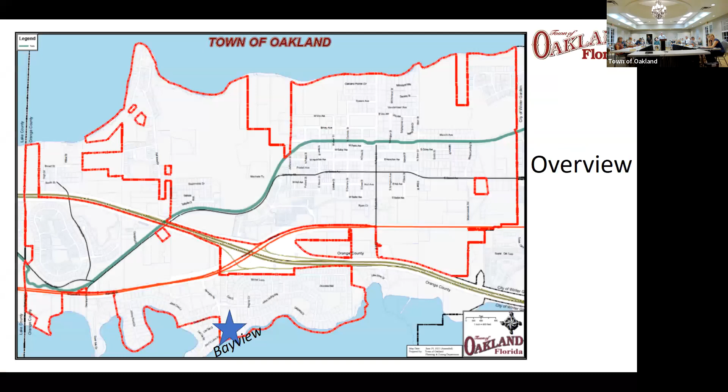Thank you, Mayor. Again, Brad Cornelius with Wade Trim, the contracted town planner. As you all recall, in August this was before you for your consideration for the preliminary subdivision plan for a proposed 20-unit single-family subdivision at the end of Remington Road.

Where we are in this process, just to make sure everybody is aware, this is still step one of the overall process for this project to move forward. This is the preliminary subdivision plan, so not all the 100% engineering answers are here yet. The majority picture is there, but there are still details to be worked out as it goes through the process. But overall, this is reasonable in what we have before us. If approved this evening, they take this concept plan, develop the 100% engineering construction plans, prepare the plat, and that will then come back before you all for approval again. So you'll see this again as it moves through the process. Those are steps 2 and 3. We're at step 1 tonight, just to make sure that's clear to everyone.

So again, just an overview very quickly. This is a 7-acre site at the southern end of Remington Road, and it's a vacant property at this point.

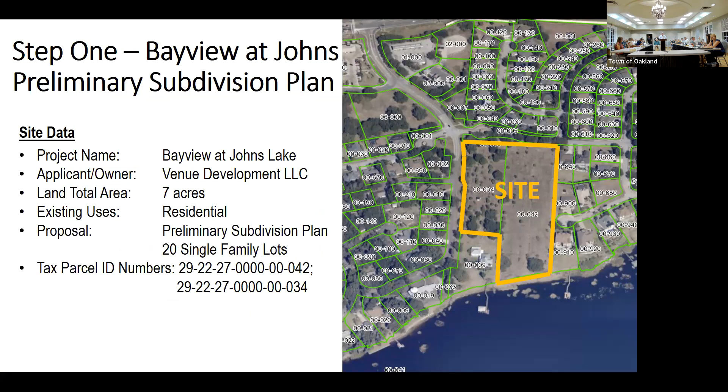This is the new subdivision plan. The full packet is within your agenda. It's still 20 lots as you saw previously. What has occurred since August is a lot — there have been a lot of meetings, discussions, and review working with the applicant. As you may recall, there were several issues and concerns that came up before: concerns about the adjacency and compatibility with the adjacent neighborhood, and concerns about traffic and infrastructure. Those are probably the two largest concerns discussed at the last meeting, so we've tried to address those over the last 3 months working with the applicant.

So the first part is to go over compatibility in terms of density and lot sizes, which was a concern at the last meeting. This property, within your future land use map and comprehensive plan, has a designation of low density residential, meaning it could have a maximum of 3.29 dwelling units per acre — that's the most that could be on this property if things fit. This property, at 20 units on 7 acres, is being developed at 2.86 units per acre, so it's actually being developed at less than the potential maximum. Nobody's ever guaranteed the maximum because it depends on site characteristics and constraints, but they are within the maximum allowed.

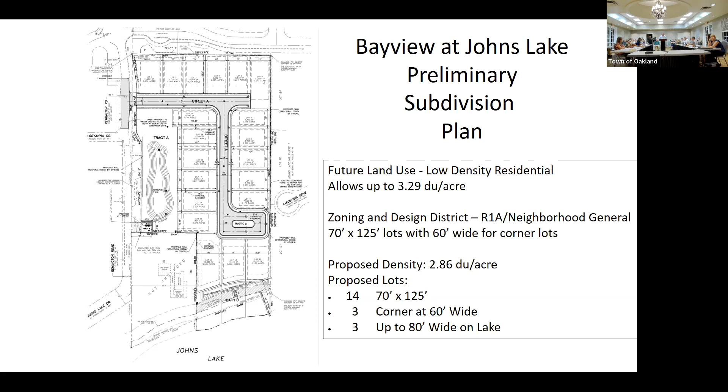That addresses that. Next, the Johns Landing buffering coordination — probably a big part of our discussion at the last meeting. As you're aware, this property abuts Johns Landing to the north and east. The pictures on your slide show the existing fence with brick columns on the northern and eastern boundary of the property.

So there is an existing fence line there. What's been happening since August is the developer, the applicant, has been meeting with the John's Landing HOA to try to work through the issues and coordinate what would happen along those boundaries, those interfaces with the project. The last meeting was on October 17th. I have in your agenda packet a snippet of an email from Mr. DeRuthi about the result of that meeting, but I won't speak for them. I'll let them present what happened there.

One thing we've recommended to address this concern is a condition requiring them to continue dialogue and coordination with the HOA to come to a resolution on what that boundary will be. Will it be a brick wall? A landscape wall? What will it be? What do both sides want it to be? Again, consistent with what we as a town will approve.

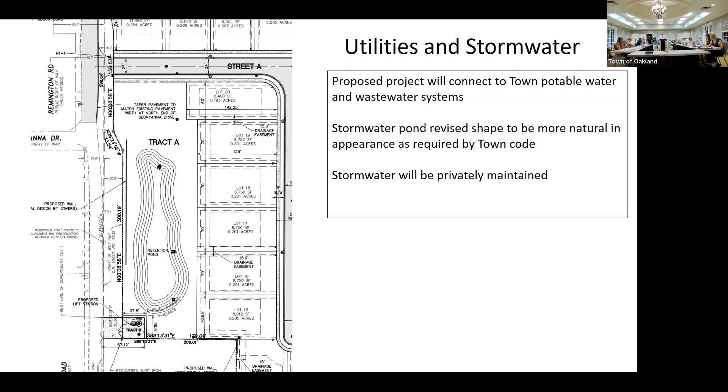The next part was before you back in August and is still before you - this project also involves a memorandum of understanding. The road and utility improvements I spoke about are part of that memorandum, which spells out what the developer is required to do at their own cost as part of this project: their access to the project, constructing and dedicating the lift station, looping the water system, providing all on- and off-site improvements required for connection to the town's wastewater system, constructing sidewalks, reconstructing Remington Road, and when they come through platting, providing appropriate financial guarantees for the infrastructure construction as required by your code. The applicant has already signed that memorandum of understanding, agreeing to all those conditions. What we're asking the town commission tonight, if you approve this, is to also authorize the town manager to sign that memorandum of understanding for this project.

In our review of the updated engineering plan, our engineer raised a couple of issues we believe can and will be addressed prior to final engineering. One concern we discussed with the applicant on Friday is the grading of lots, particularly the three on the lake side - there's significant grade change on those lots. We want to make sure that's appropriately addressed so it doesn't cause site impacts. The applicant has some ideas, like stem walls and terracing, which already exist in John's Landing to deal with those issues. We believe it can be addressed as they move through the rest of the process with the town.

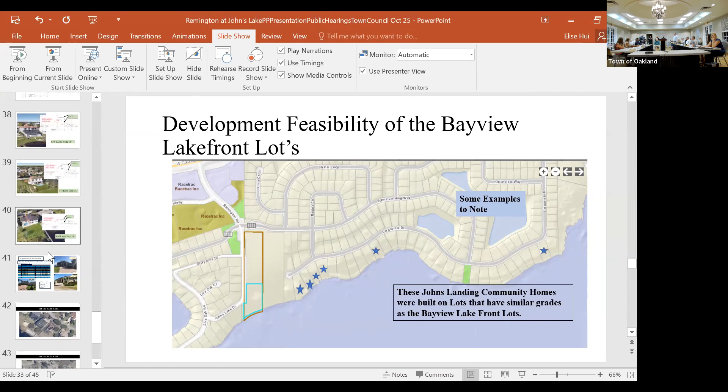Well, I do, and in regards to some factual information we've gathered, because I took the approach, quite frankly, to try to evaluate lot sizes in a very correct, objective way, meaning let's prove ourselves wrong, let's prove that it shouldn't be, or should be, larger per se. And if I may, I don't know if you can see these slides, but I did an analysis of the closest benchmark, which is John's Landing.

So we looked at the overall lot constitution of the 31 lots along the lakeshore in John's Landing. Of those 31 lots, basically 10 of them, a pretty good percentage, about a third, are within what I'd call arguably a tolerance in size, ranging anywhere from 80 feet to 96 feet. There are 3 lots that are respectively 80.65, 87.88, and 86.75.

And I looked at it and said, well, how is the curb appeal of those homes on a lot of that size? Because ultimately we're in this for the long run, we're going to be there to do site work, we're going to turn it over to the builder and they have to have viability. So I looked at it again from a subjective point of view. They don't look so bad, in terms of the curb appeal of these homes, on an 80-somewhat foot lot.

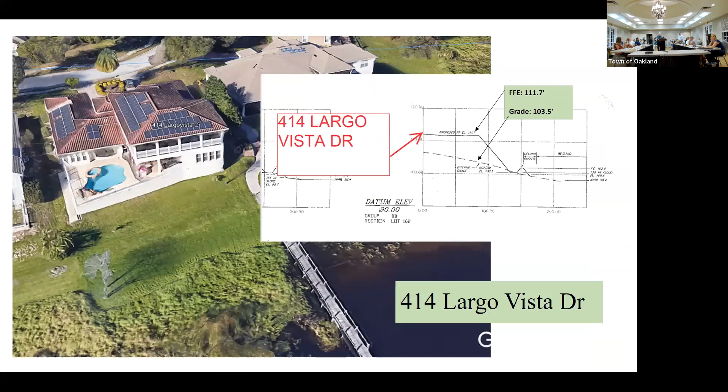So are those three examples you have up there the 86? Yes, the 80, the 86, and those are in John's Landing, the three smallest lots on the lake, correct. They're 86-foot wide lots. An 80 and 86 and an 89 or something. 80.65, 87.88, 86.75. So three lots right there are 87 feet or less. They're in John's Landing. He's giving you an example of what the 80-foot lots could support within Bayview.

And there's aerials as well. Granted, some of the lots may lie differently towards the lake, but it just appeared to make sense.

And this is the appropriate three lots adjacent to your property. I thought one was like 125 feet right next door. Yeah, it is, they vary. He was talking about all the lakefront lots as a whole. The ones that are adjacent, I went and looked at them also. The ones adjacent to them are all in the 120s.

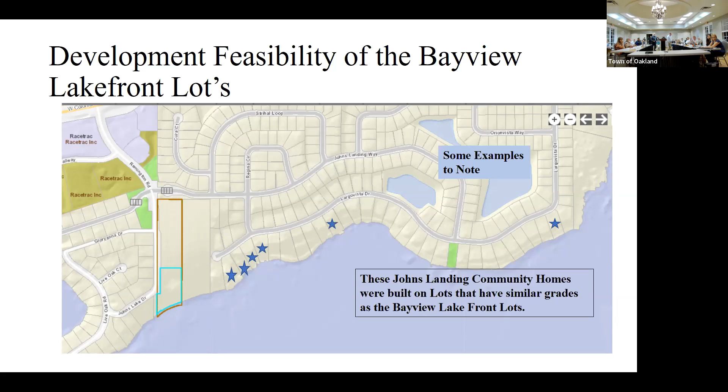The only issue I have, but I would also question their measurements. I'm not worried, I mean the other lots on John's Landing aren't square or straight like this, they've got a skinny part and a wide part on their lots. Are you taking the skinny side of each lot, is that where you're getting your measurements? Well, I'm taking the curve, the curb measurement, at the curve, that's apples to apples. Basically we're looking at our curb point width, and these are all curb point width comparisons.

Okay, I stand corrected if I may. The sample set we saw on that slide had to do with similar grade and finished floor elevations that our engineers could speak to, with regard to stem wall and terracing solutions that have been done, which is another thing we have opinions about. If that's not appropriate to talk about right now, I don't want to talk about it, that's fine.

Correct? Steve, Brad? Yeah, we're not talking about design of houses. I don't want to talk about terracing. I don't want to talk about stem walls. It has nothing to do with this conversation. What he's putting forward is appropriate. Stem walls is something that we need to discuss, but it's not necessarily the conversation for right now. No, and Lord knows it's hard enough to have this conversation without adding any more.

That was my only question to answer your question. So what are our options? We can vote no and tell them to bring us back a different layout with larger lakefront lots. What, they're already within code? They are within your zoning code and the neighborhood general as far as meeting the density requirements and the lot sizes. So tell me what our options are.

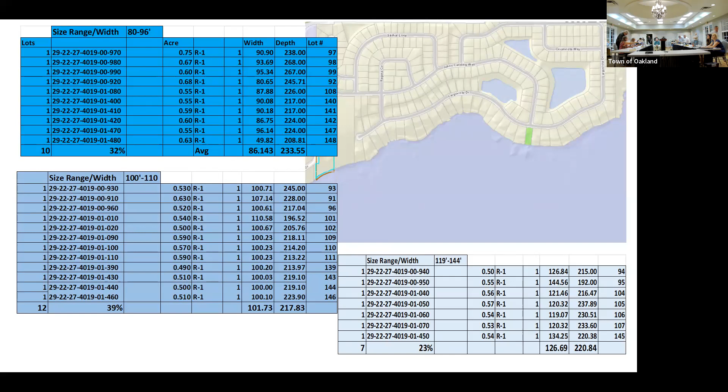So I was talking real estate. Rick? Can somebody come give it to Rick? Steve, you want one? Scott? Yes, sir. Say something.

So this is Scott Fontenot. Scott Fontenot, I live at 516 Corona Vista. I think my picture's on there, so I can give you some perspective on what my lot looks like. I think the bottom right is my address, 516 Largo Vista. But what do you mean you think? You don't know your address? No, I think. I know.

Okay, I don't know what my front size is, but I know that it's oddly, my curve is shorter than my lakefront. And I think it's on his sample, so he may know exactly what it is, but to give you some... is that right there, right? Yes, the one with the two trees in the back, yes.

I don't know how big it is, so I don't know on your list if it was in the 80s. I'm just giving, and my belief is if it's 87, the one that's outlined there, I can't tell which one's outlined for 87 by... 88 was like 226. Is it up on top? If the house is... this one. This is, okay, the blue, that's got it, yeah, that's it. All right, I'm on the sample.

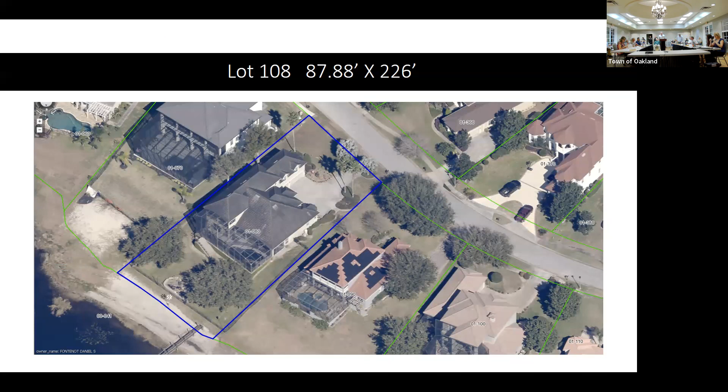Well, a couple of things I think to keep in mind on the proposed project are the lot sizes themselves. I know the 284, all the lot sizes, but 284. You know, the new project will be on sewer, so the need for a septic or drain field or anything is null and void with this. The other good thing about this particular project is it will bring sewer down the street, so as septic tanks start failing, you have the ability to then connect to those houses that sit along the lake.

Yeah, my biggest nightmare for anyone is that your sewer or your septic tank fails two years before you're required to hook onto sewer. That's a double whammy. Yeah, it stinks. So that's just a couple of things. I think the lot sizes, if your property is not going out into the lake and it stops right at the water level or whatever it does, that could be the difference there. But that's my take.

Thanks, Shane. Okay, how deep are these three lots? This thing here says these three lots are... our three lots and paving, this one. The three lots are 79, two of them 79 by 284 and one of them 80 by 284. So two of them are 78.94. So it's 284 feet deep. Deep length, yeah, that's pretty significant, a long way.

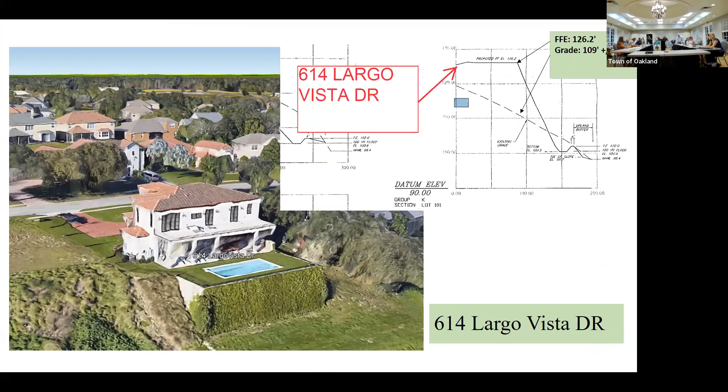Everybody else, yeah, I want to get public comment. It's really... I'm just giving you a hard time. Sorry, okay, at the table. Are we still worried about lots?

Well, the reality is, we seem to be probably a little more worried about it than they do. But tell me why you're worried about a lot that is extremely similar to a lot of the lots. Are you on the lake, Scott? Yeah, he's on the lake. How far is it, the depth, same? When I went and looked at them, the three that were right continuous to these three were three really big ones, and it was very obvious.

And have they been built on? Yeah, they're built, this house is there. It was like a cul-de-sac. Okay, yeah, and that was a concern on the looks of it compared to your neighbors.

This is something that becomes a painful point every time we go to the Lake. We have talked about the fact that we want to get to a place where maybe we don't do some lakefront. But I don't think we're there yet.

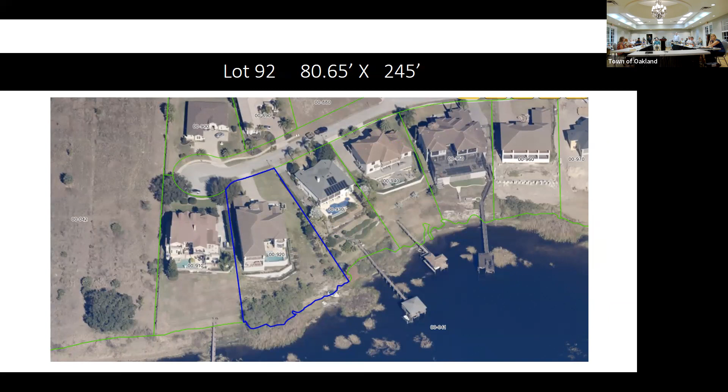So, correct, Steve? You don't have a whole lot of future opportunities other than what's in Barley Farm, and only a couple of those are being proposed as lakefront, the rest are Lakeview. You've got these three here, and you may have a few eventually on the former Bin Laden property that might be lakefront, but you don't have a whole lot more coming before you as far as lakefront lots.

Okay, just to go back, I didn't realize it's a different lake, but at Hull Island, the lots that were approved there were 80 and 85 feet. They started out at 60 and we got them up to 80 to 85 feet. Do you remember what they were by? Were they by 200 feet or? I don't know how deep they were.

I couldn't tell you. All right, and then the other thing to think about is this is within our code. It is. So we open ourselves up for further scrutiny that we may not want.

I am agnostic on this one. Considering, I look at Scott's lot and that looks darn big to me.

Okay, Ed, I'll let you say some nice stuff. Thank you. And then we need to get a vote on the table, we don't have a vote on the table. We need to get a vote on the table and then we'll go from there.

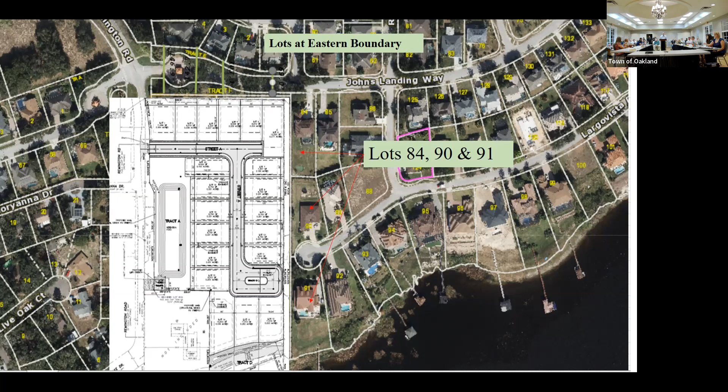All right, so I think what our options here are is vote yes, or make a motion to accept it as is, as presented, with the staff recommendation, which are on the last page, so make sure you guys are comfortable with those.

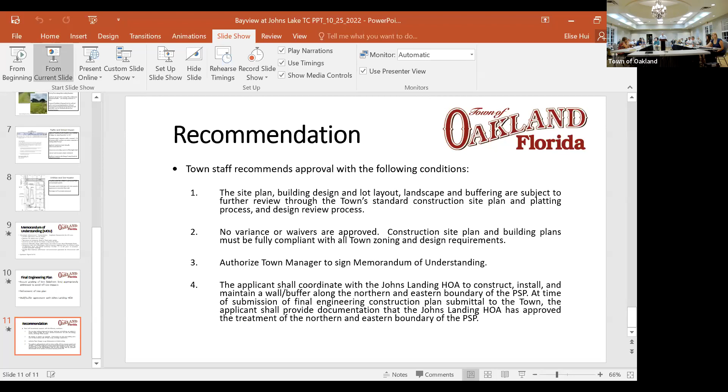So Stephanie, listen hard for me, to accept it, with the provision that we want the lakefront lots to be larger. Can we do that, or can we just table it? We can vote no, we can vote yes, we can table - I would say those are your better options. If we're going to table this, we need to table it to the next meeting, because I really do feel for the developer, this has gone on long enough that we need to get the advertisement out.

Do you think you can do that, Elise? I already have the advertisement out for the second reading because of the timing. So I'm sure you and Stephanie can figure that out, right? This isn't an ordinance, we're not reading this as a second. Oh sorry, no, I don't have to advertise this one. Sorry, I was thinking of the ordinance. So, yes, no, or table to a date certain - but this is the last time we can kick that can down the road.

I'll go ahead and make the motion that we table it to the next meeting, to give them one more chance to talk about these lot sizes, which have gone from 3 to 2. Everything else we would agree with on the recommendations. I need a second, please. I'll second that. It's been moved and seconded. I'm going to open a public hearing - does anybody have any further comment?

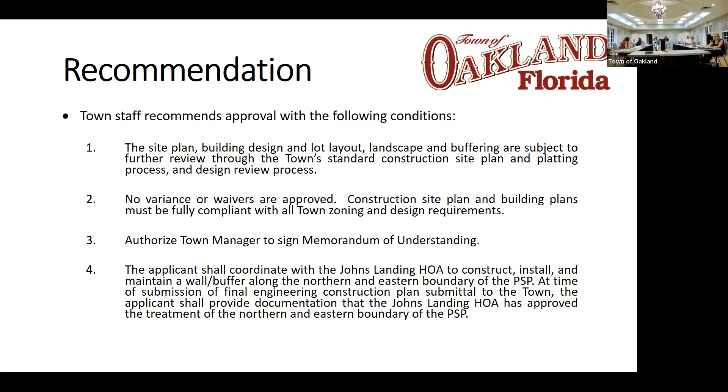Couple things - you've seen some press releases. Just a reminder, we've got Santa's Lane coming on December 3rd. We've already had a lot of people looking at that and viewing it.

We've talked about this previously, but we've got a $300,000 grant for a water related project, which actually benefits Johns Landing because it will help create the loop that's not within Johns Landing right now. So if they're worried about the water at Bayview, this will help - it will enhance their water system and their pressures.

And then we've also seen the press release on the Oakland Police Department seeking the grant for the K-9 program. Vote, vote, vote - yeah, vote every day.

And then the last thing I have is Jack and Mike have been working with a vendor about painting the water tower with the new logo. How much does it cost? $21,000. That's all? So we are going to move forward with that, we will accommodate that - it makes no sense not to. Well, we might spend more, just for the water tower.

Yeah, we're going to fix the lights too. Are they going to do the background paint and the logo, or just the logo? They have to paint the cylinder in order to have a smooth background. That's what I would think. $21,000 - let it go, Mayor, we got a good price.